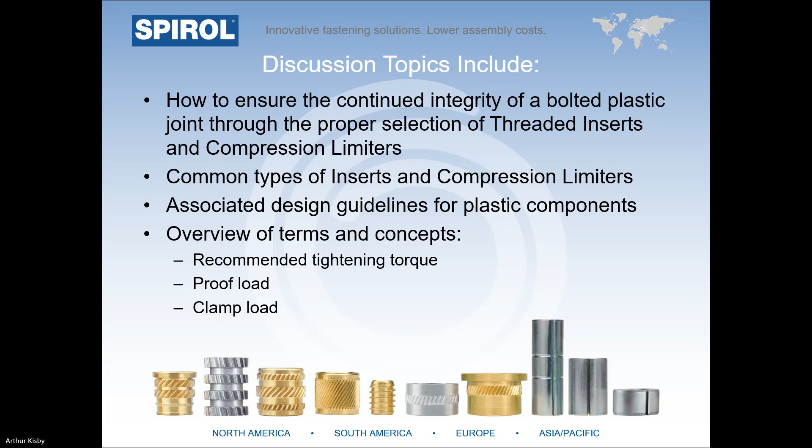But before we get into this, I want to give a brief overview about SPIROL itself. SPIROL is a global manufacturer and supplier of engineered components used for fastening, joining, and assembly. We have 12 major product lines, each one designed to improve product quality, simplify assembly, and/or reduce total cost of assembly. We're the only company who designs and manufactures both our engineered fasteners and installation equipment.

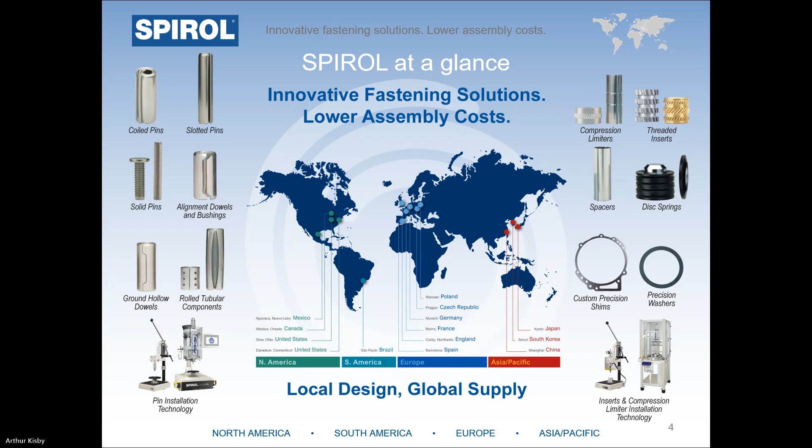Our focus is not just about supplying a high quality product, it's on partnering with our customers as early in the design stage as possible to aid them in design. This is not only for the fastener, but also to make critical recommendations between our product and their components so that their assembly goes together and stays together for the intended life of that assembly. At present, we have 15 locations around the world and have application engineers at each of those locations. We're ready to work with you on your new and existing applications.

Today's webinar is focused on inserts and compression limiters for plastic assemblies.

Where are inserts and compression limiters really used? The answer is pretty much everywhere and in every market, such as automobile, agricultural equipment, rail, recreational vehicles such as snowmobiles, jet skis, and boats. They're used in home appliances, medical equipment, hand and power tools, industrial equipment, and airplanes. They're literally everywhere.

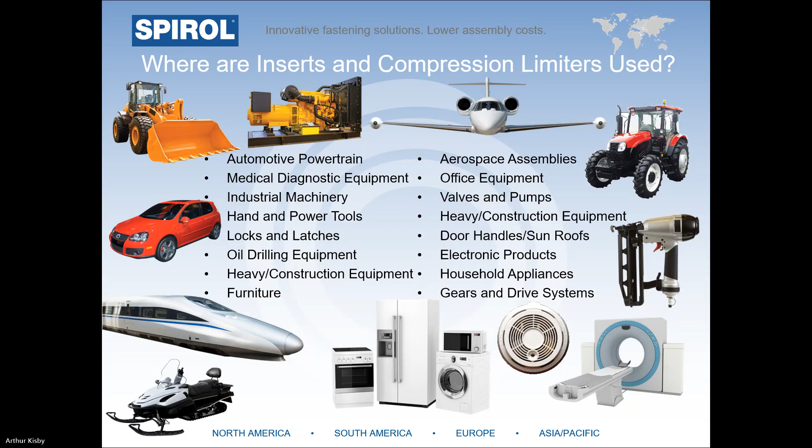In both ICE and EV automobiles, you will find SPIROL products across a multitude of assemblies.

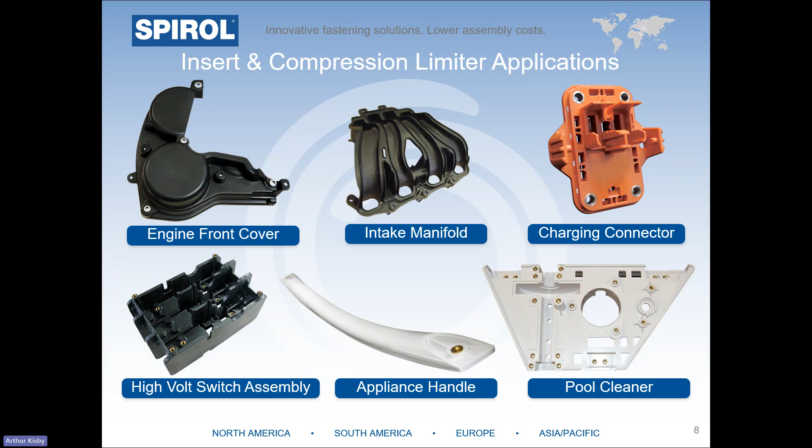These are used for solar-powered homes. In the lower left-hand corner, there's an example of threaded inserts used in a high voltage switch assembly, and then an oven handle where the bolt is threaded into the metal insert rather than directly into the plastic to ensure joint integrity over the life of the major appliance. Finally, you will see an automatic pool cleaner housing where there's literally dozens of inserts used on both sides of the plastic component. When discussing the performance of compression limiters and threaded inserts, it's important to tie them back to the bolts that are being used in conjunction.

While bolt performance is defined by an industry specification that outlines how much force the fastener can withstand before breaking, the proof load is the maximum load that can be applied without risk of permanent deformation. This is when the bolt won't return to its preloaded condition after the joint's loosened.

The clamp load, on the other hand, is how much load is applied to the bolt when the joint is tightened. SPIROL recommends that a joint is tightened to clamp load somewhere between 25 and 75% of the proof load, due to the relatively large tolerances associated with torque measurements.

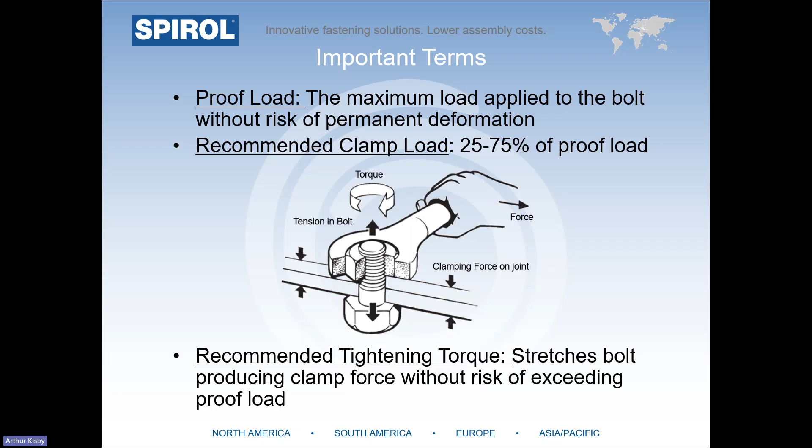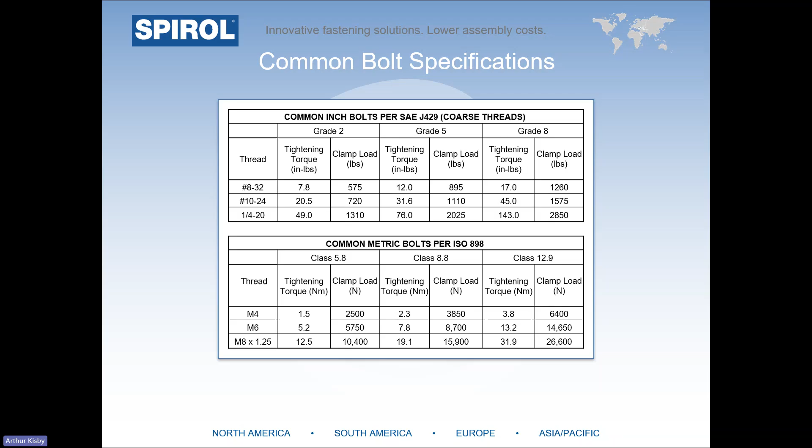The amount of load a bolt can withstand is typically defined by the bolt's thread size and length, grade for inch bolts, and class for metric bolts. What's displayed on the screen here are the most common bolt specifications defining bolt strength. This table illustrates each thread size's tightening torque and clamp load specifications.

So why do people use threaded inserts in plastic? Well, first and foremost, inserts provide reusable threads and form secure, tight threaded joints. Since you thread directly into metal rather than plastic, you have unlimited assembly and disassembly without fear of stripping the threads. You're able to meet the proper seating torque for the bolt.

Of course, that's if the integrity of the plastic is there. Unlike when you thread directly into plastic, you don't have to worry about creep or stress relaxation that could result in a loose joint. And finally, given that the OD of the insert is approximately 2 times the OD of the bolt, this results in 4 times the shear surface for enhanced load carrying of the bolt assembly.

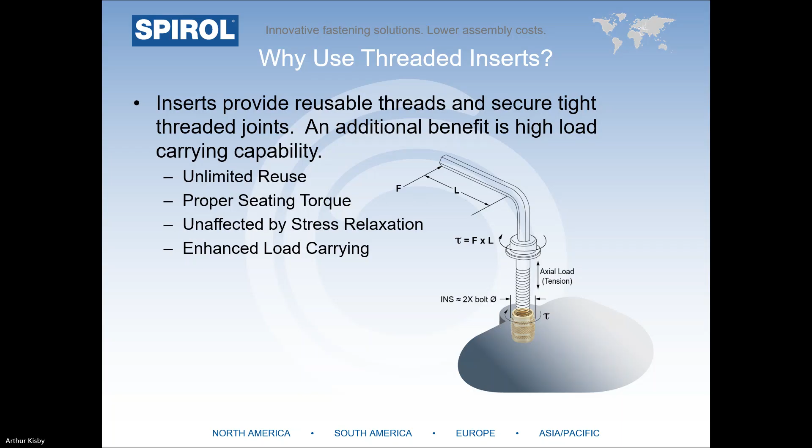Now, before we talk about what types of inserts are good for a particular application, we need to review that there are 2 major types of plastics: thermoplastics and thermosets. Thermoplastics essentially can be melted and remelted several times into several different shapes without compromising the mechanical properties, whereas thermosets have a one-time reaction from liquid to solid and cannot be remelted.

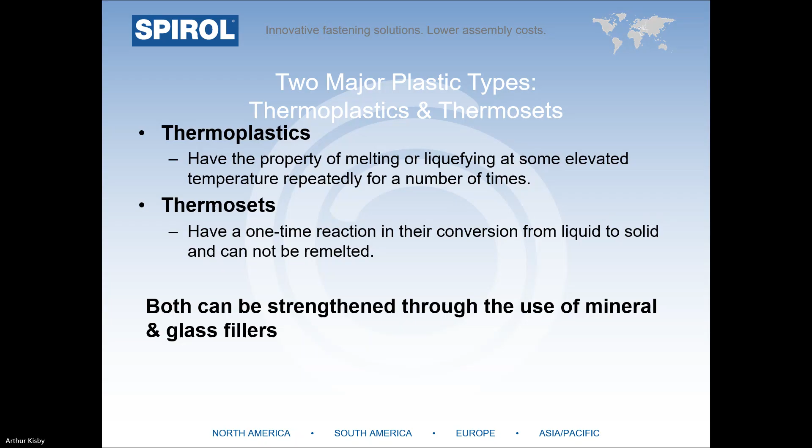Both thermoplastics and thermosets can be strengthened using glass or mineral fillers. Usually the higher percentage of the filler, the stronger the plastic.

SPIROL's threaded inserts are categorized by the primary method of installation. While some of the inserts are designed to be overmolded into plastic, allowing the molten plastic to flow around and into more aggressive retention features, most of our inserts are designed so that they can be installed in a secondary process after the plastic has cooled. We refer to these types of inserts as post-mold inserts.

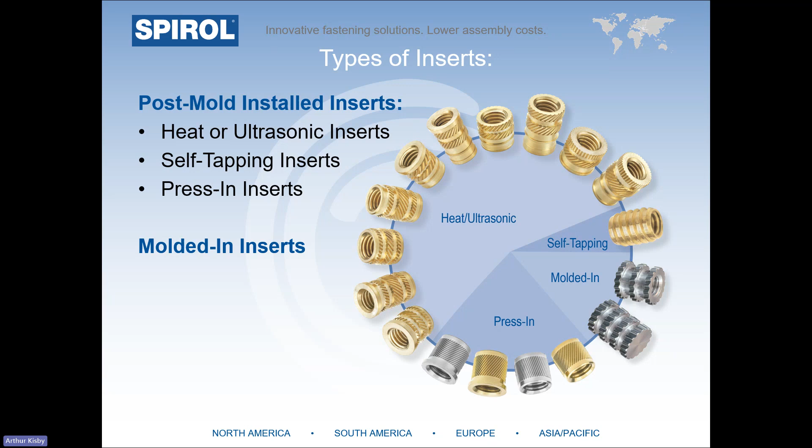Post-mold inserts can be installed in a variety of ways, by either locally remelting the plastic with heat or ultrasonic installation, by pressing them into the plastic cold, or even screwing them directly into the plastic.

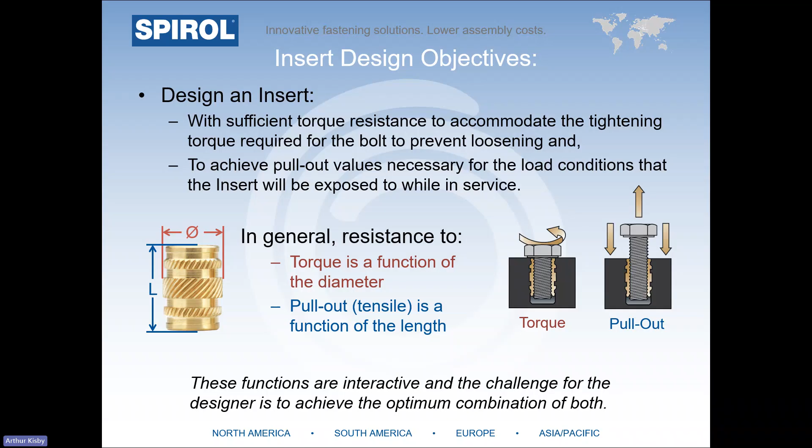Inserts should be designed with sufficient torque resistance to accommodate the tightening torque needed for the bolt to prevent loosening, as well as enough pull-out resistance for the loads they'll face while in use. In general, resistance to torque is a function of the insert's diameter, while resistance to pull-out, also known as tensile, is a function of the insert's length. The designer's challenge is to determine the best balance between these two design criteria and optimize performance within the space allotted, since space is often limited within assemblies. As an insert's length is so critical, we offer almost all styles in both a short version and a long version.

The internal threads of inserts are designed around industry standard metric and inch bolts. Performance of the insert is generally achieved based on the amount of displaced plastic filling the various features of the insert. There are typically three different types of knurls: diamond, straight, and helical, and they are primarily used to increase resistance to torque. Straight knurls have the best resistance to torque since they are perpendicular to the force, whereas helical knurls provide resistance to both torque and pullout, as they are at an angle.

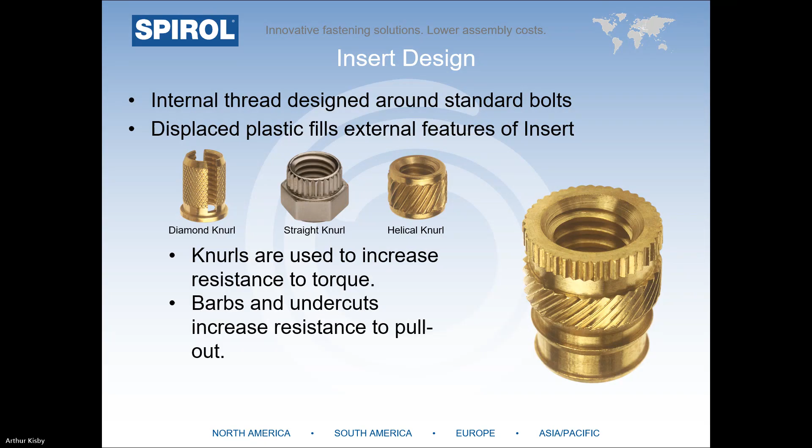In order to specify the best insert for a particular application, it is critical to understand the plastic specifics, meaning not just whether it is thermoplastic or thermoset, but what specific type of plastic it is, the percentage of fill, and the type of fill. If possible, the brand name of plastic, such as a DuPont Nylon 66 with 30% glass fill.

We also need to understand the geometry of the host component, including available space for hole diameter and wall thickness, what bolt size you're planning on using, and what grade or class of bolt you're going to be using. This is very important because, as mentioned earlier, the class or grade actually dictates the recommended tightening torque for that bolt size.

We also want to make sure we understand the performance requirements for the application, torque and pull-out or tensile strength, and what the mating component configuration is. Finally, how do we plan on installing the insert? Is it mold-in or post-mold installed? If post-mold installed, will it simply be pressed into the assembly, tapped into the hole, or heat or ultrasonically installed?

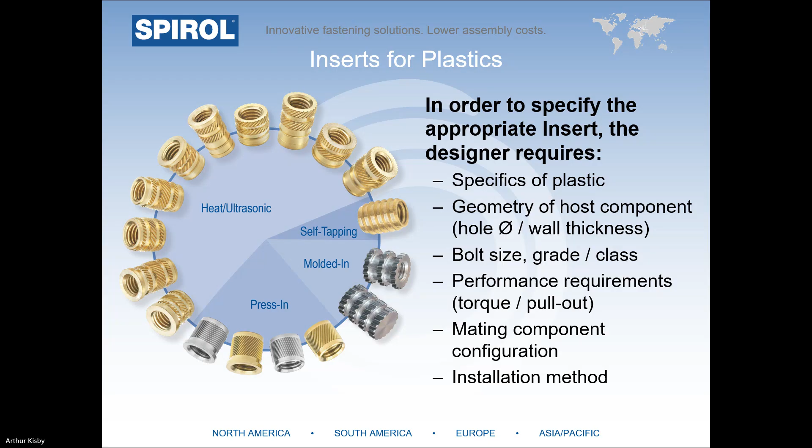There are many factors besides an insert's design that affect how it will perform in the assembly. As the quality of the interface between the insert and the plastic component is so critical to how much torsional and axial loading the insert can withstand, the quality of the insert's installation is paramount.

These images demonstrate how SPIROL recommends validating installation quality through a destructive test. We recommend cross-sectioning the plastic after the insert gets installed so that this interface is clearly visible.

After the insert is removed from the plastic, a mirror image of the insert's features should be present in the plastic. As you can see in the incorrect example on the left, the knurl's imprint in the plastic is very shallow, and there doesn't look to be any evidence that the barb actually engaged with the plastic at all. Also worth noting, there shouldn't be any voids present between the insert and the plastic.

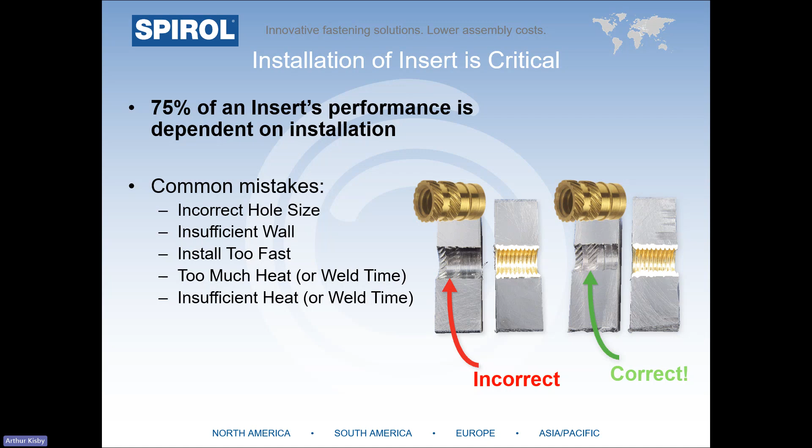Although some common errors that lead to poor installation are listed to the left, the example shown here appears to be the result of a hole size that was a bit too large. Not enough plastic was flowing into all the retention features in the knurls.

It's not just the interface between the insert and the plastic host component that are critical to performance. The mating part can also significantly reduce resistance to rotational torque when it doesn't support the top bearing surface of the insert. We call this condition jackout. When the hole of the mating component is larger than the face of the insert, there is nothing to prevent the insert from dislodging and moving up into the void of the mating part. To avoid jackout, we recommend that the mating component's hole is smaller than the face of the insert, but large enough to allow the bolt to pass through.

One strategy you could implement is to use a flange or a head on the top of the insert to increase the bearing area. It's worth noting that using a headed insert does increase insert costs due to the additional material needed to form the head.

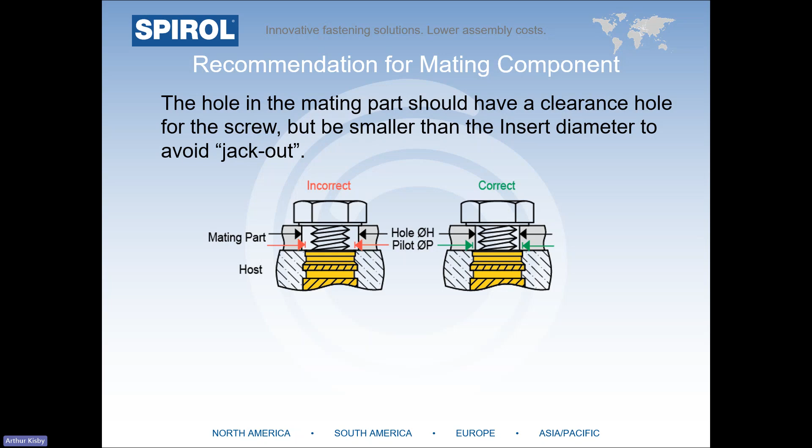When installing the insert into the hole, the top of the insert should be as close to flush with the surface as possible. The maximum protrusion above this flush should be 0.13 millimeters, or 0.005 inches. You really want to be careful about having the insert subflush, or else you risk again jacking out the insert out of the hole, or at least breaking the plastic plane while torquing down the bolt, which could affect the joint integrity.

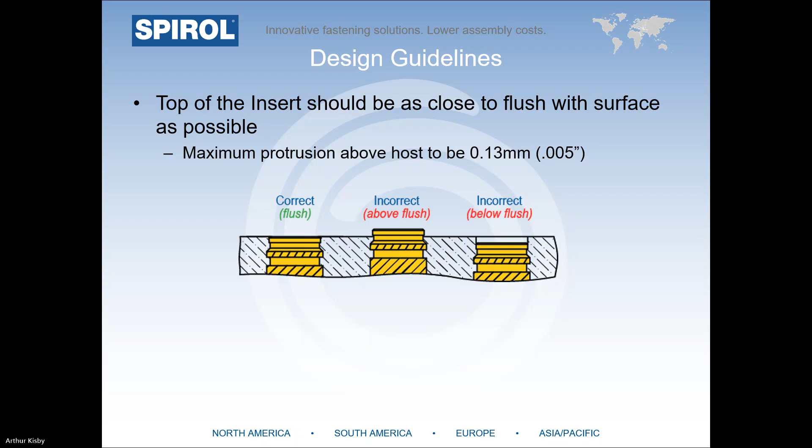In terms of hole configuration, the diameter of the plastic around the hole, known as the boss diameter, should be sufficient enough, typically twice the OD of the insert itself, to avoid bulging during installation and ensure integrity to withstand the recommended tightening torque. Also, in the event that it is a blind hole, the length of the hole must be long enough to prevent the screw from bottoming out.

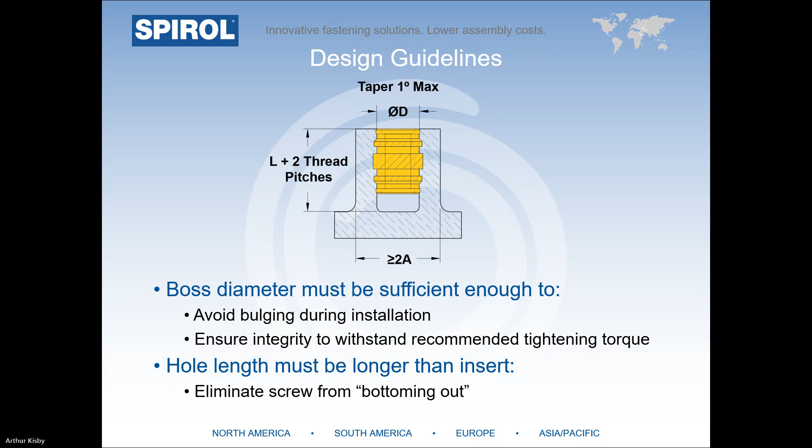For heat ultrasonic installation, the length must be plus 2 threads to allow the flash or material built up ahead of the insert a place to flow during installation.

The hole size of an insert gets installed into is also critical for the insert's ability to perform in the assembly. For inserts that are used in straight holes, it's recommended that the taper doesn't exceed 1 degree inclusive, or a half a degree per side.

For inserts intended to be used in a tapered hole, we recommend the taper to be 8 degrees, or 4 degrees per side. Using an insert designed for a tapered hole assists with removal of the plastic component from the mold, but also allows the insert to sit deeper into the hole prior to the installation, facilitating square and faster installation.

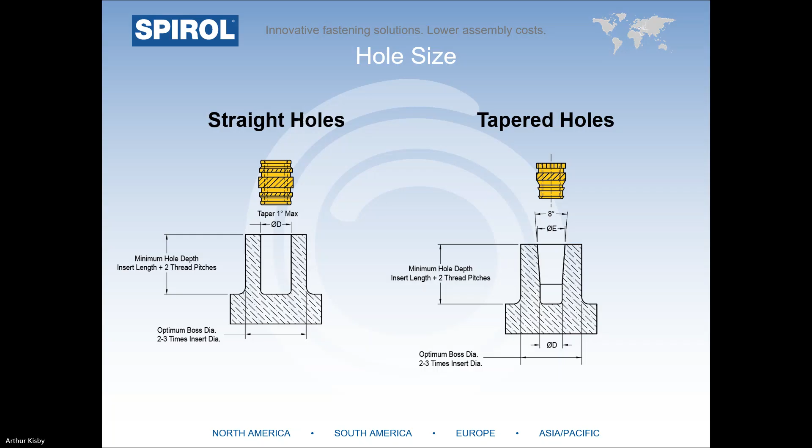Regardless of the hole style, it's imperative to hone in on the correct hole size for the application. As a general rule, larger hole sizes decrease performance, while smaller hole sizes may induce undesirable stresses and potentially lead to cracking. The recommended hole size found in our design guidelines will typically need a slight positive adjustment, if any. Usually, the hole size needs to be adjusted upwards further when the plastic type is more viscous or it doesn't flow very well, such as when fillers like glass are used.

In the example shown to the left, no filler is being used and the plastic is polypropylene. Noting the recommended hole size for an M6 heat installed insert is 8 millimeters plus 0.08 minus 0 millimeters. However, if that same component was made of nylon 6/6 with 35% glass fill, we'd recommend adjusting the initial hole size up by 0.15 millimeters.

It's also important to emphasize that the core pin used to mold in the hole should be appropriately sized to allow for plastic shrinkage after cooling. The hole size should be verified with a plug gauge post-cooling. In summary, it's imperative that a designer perform testing to validate the appropriate hole size for the application, not just rely on the recommended hole sizes we publish in our catalog.

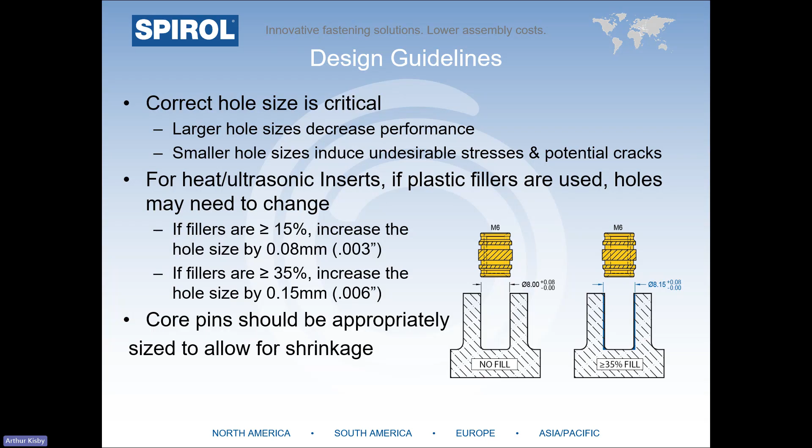In high-load applications, a headed insert with the head located opposite the load in a pull-through configuration is a design consideration that may be warranted. Tapered inserts should never be used in pull-through applications or in thin-walled bosses, as they will cause cracking of the plastic.

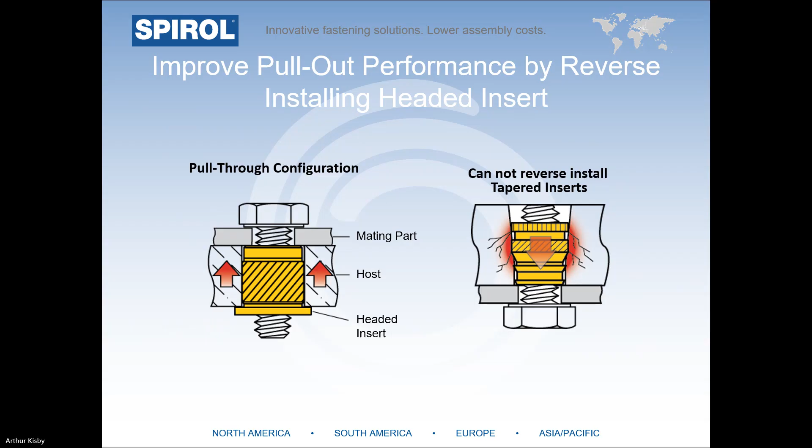Each type of insert differs in design, which yields different performance results, as well as the cost of the insert and the overall cost of the assembly.

Starting with heat ultrasonic inserts, some are designed for straight holes and others for tapered holes. If you attempt to use a straight insert in a tapered hole, the performance will not be optimal. In many cases, you may end up totally cracking the plastic.

Symmetrical inserts require straight holes. As Arthur just said, tapered holes facilitate proper seating of the insert, and since the surface contact between the insert and the hole is maximized, installation time is usually less than that of a straight insert of the same size.

Many heat ultrasonic inserts are available in both a long and a short version of each thread size. Long lengths maximize torque and pull-out resistance, while short lengths are good for less stringent requirements at a lower cost and shorter installation times. You can also get most styles with or without a head.

The head provides the bearing surface for the mating component that also prevents jackout, or when used in reverse can prevent pull-through. However, adding a head comes at a cost because you have to start with a larger piece of raw material to create the head.

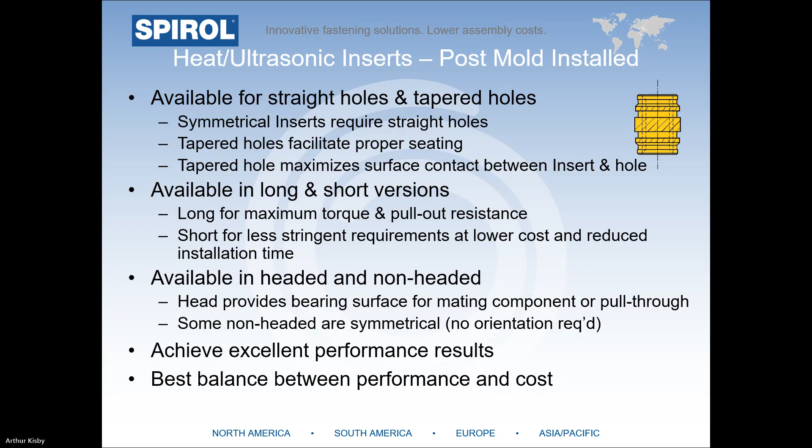Notice the external thread on the self-tapping inserts. This type of post-mold installed insert is actually threaded into the hole after the plastic cures. The external threads are designed with a thin profile to minimize stress in the plastic, and relative coarse pitch to provide maximum plastic shear surface to resist pullout.

As a matter of fact, these provide the best resistance to pull out of any SPIROL post-mold installed inserts. However, due to the external thread, the manufacturing cost of the insert is usually higher than other types of inserts, and the cost of installation is the highest of all post-mold installed inserts because of the care and time it takes to thread it into the part.

The schematic in the lower right shows the recommended length of hole for this type of insert is 20% longer than the length of the insert.

Counterbores are typically not recommended for any insert except self-tapping or headed inserts. Counterbores are recommended for self-tapping inserts to reduce the risk of flaking. The outside diameter of the counterbore should be equal to or larger than the outside diameter of the self-tapping insert.

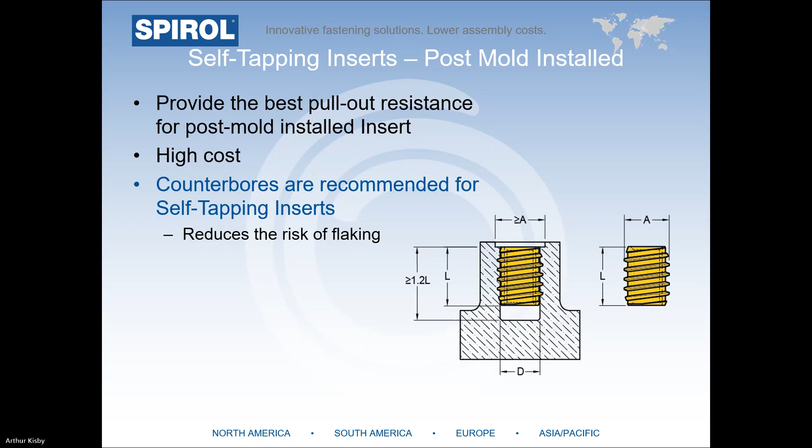Our press-in inserts, on the other hand, were designed to reduce installation cost. Instead of the large exterior threads you find on the self-tapping inserts on the previous slide, these types of inserts have helical knurls to provide both torque and pull-out resistance without the need for screwing them into the hole.

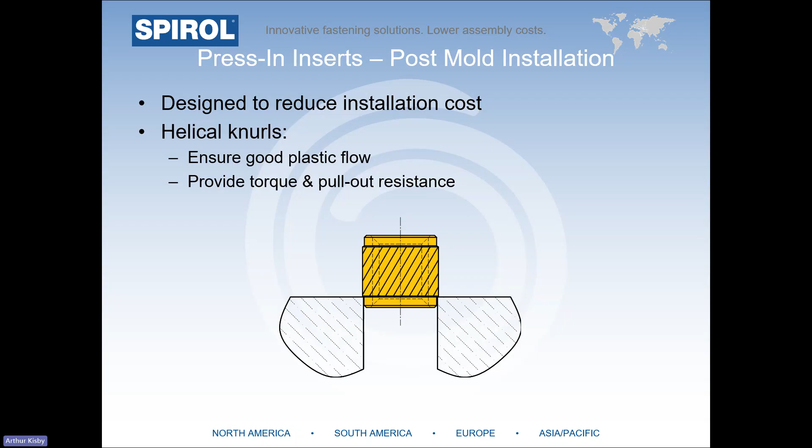As you can see in the illustration, a pilot facilitates straight insertion into the hole, and since the pilot diameter is smaller than the hole, and the length is long enough to allow the insert to sit in the top of the hole before installation, they're a great low-cost option for applications that don't require super high performance. Press-in inserts are available with or without a head, and we offer them both in brass and in aluminum.

For applications that require the highest performance, our molded-in inserts are designed for maximum pull-out and torque resistance. These are often the inserts of choice for thermosets, which are the types of plastics that can't be remelted, as well as plastics with a much higher percentage of filler.

The minor thread diameter tolerance on these overmold inserts are tightly controlled to provide a repeatable fit on the core pin that's used during the molding process.

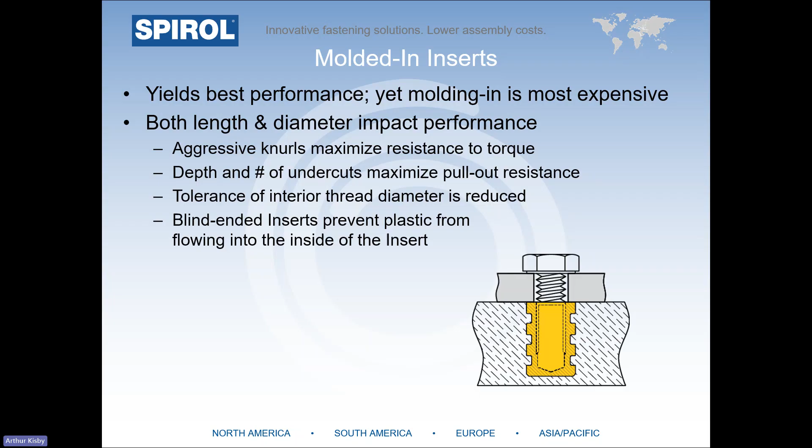SPIROL offers a symmetrical through-hole version that eliminates the need for orientation, as well as a blind end version, which is sometimes preferred by some of our molders. These are made out of 2024 aluminum, a lightweight, lead-free grade.

When using post-mold installed or molded-in inserts, there are many factors to consider. Installing inserts after molding reduces in-place cost since molding time is shortened as there's no placing of inserts over the core pins. Secondary cleaning of flash or plastic around the hole entrance, which often occurs with mold-in inserts, is also eliminated. Installing inserts after molding also reduces rejects and the chance of mold damage from a dislodged insert. Keep in mind that some molds cost tens of thousands of dollars.

Post-mold installed inserts can yield excellent performance results. Conversely, when molding inserts into the assembly, molding time is increased as you have an operator or pick-and-place robot loading the inserts over the core pins before the mold cavity can close. Precise placement of the inserts is required, otherwise mold damage can occur, which can be expensive in both repair and downtime. That said, you do get the best performance out of molding inserts over any other method. The question is, what performance do you require for your assembly?

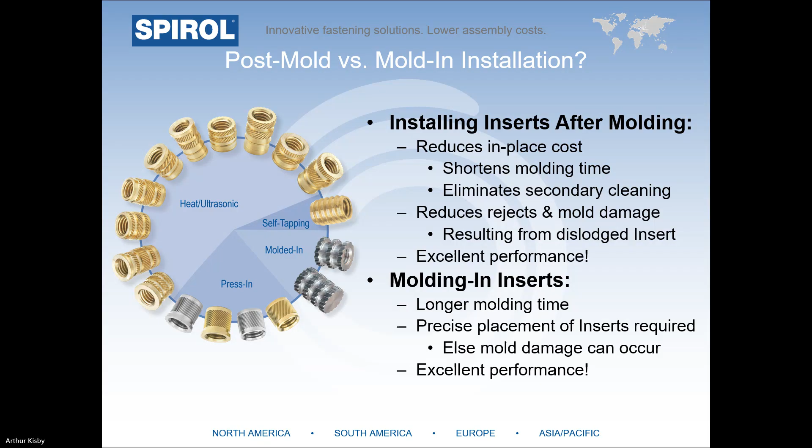So what affects the performance of an insert? There are many variables that impact insert performance within the application. Not only does insert design and quality of features like knurls, barbs, and undercuts matter, but also the type of plastic. For example, an insert installed into nylon 6/6 with 30% glass fill will totally outperform talc-filled polypropylene, as it's much more rigid.

The design and quality of the plastic molded part also plays a huge role in performance. Are there any knit lines in the boss surrounding the insert? Is the wall thickness of the plastic sufficient to handle the applied stress? Obviously, hole size will also affect performance a lot. Even hole size variation within the recommended tolerance range found in our catalog will result in different performance.

Finally, the quality of the installation process impacts performance as well. Was the proper temperature used? Were the inserts installed too quickly, etc.? Another common question we often get is, what temperature do I use for the installed inserts, and what pressure should I apply?

We recommend starting with a temperature 50 degrees Fahrenheit above the initial softening temperature for the plastic in question. But for plastics with fillers, that initial differential should be increased to about 150 degrees Fahrenheit. Pressure is insert size dependent and should be as low as possible, in the 5 to 15 psi range, just enough to push the insert into the hole as the plastic melts.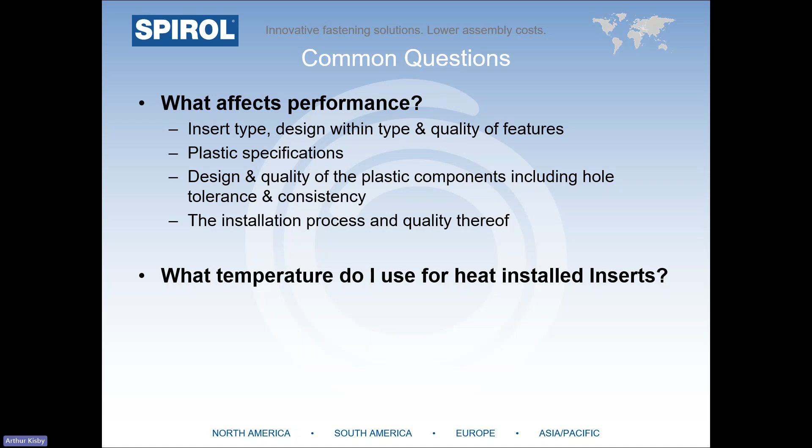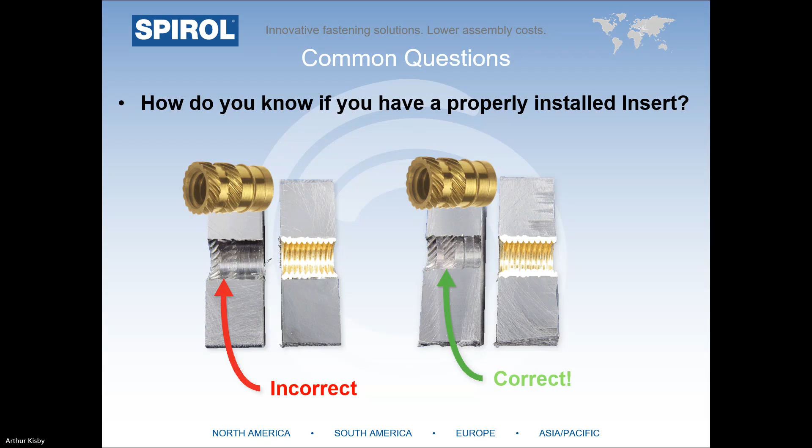It's extremely important to ensure proper plastic flow into the features of the insert, as this dictates the torque and pull-out performance you achieve. As you can see on the left, the plastic did not sufficiently flow into the retention features, which will result in low insert performance.

By far, the most common question is how much torque and tensile strength can be achieved with the insert in my specific plastic assembly. It is impossible to answer this without testing it in your actual assembly. All of the factors we just went through a couple of slides ago affect performance. In addition, there are so many different types of plastics and fillers coupled with the complexity of component design.

SPIROL provides a section in our insert design guide that displays the performance of various styles of inserts installed into a nylon 6/6 without fillers, in drilled versus molded holes. This performance data is provided as a comparative guide between insert types, not to provide actual performance. For this, you need to test.

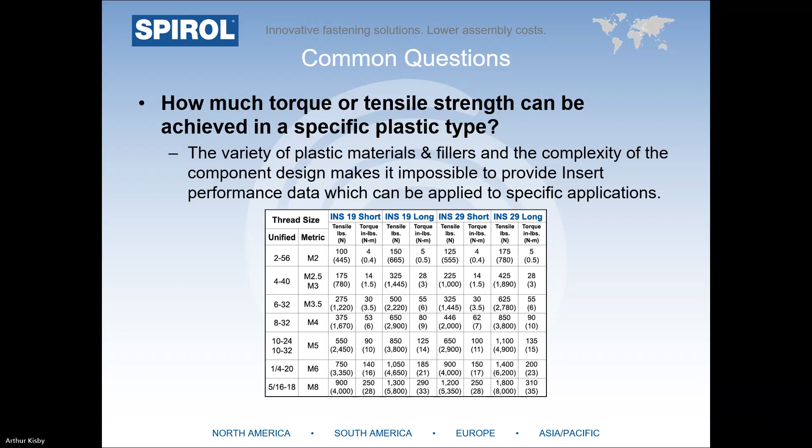Okay, so now we'll start to talk about compression limiters. This section of the presentation will go a bit quicker since a lot of the same concepts apply. Consider these as like a sister product to the inserts we've been discussing.

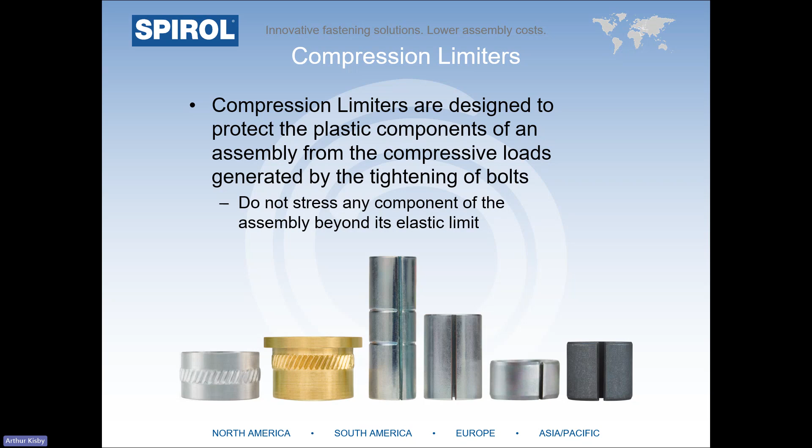So what are compression limiters? Essentially, compression limiters are spot reinforcements of metal used in plastic assemblies, designed to protect the plastic from cracking or yielding under the compressive load of a bolt. We implement compression limiters so we don't stress plastic components beyond their elastic limit.

The ability of a compression limiter to carry a compressive load is determined by two factors: the strength of the material, and the cross-section area of that compression limiter. Limiter strength can be increased by increasing the wall thickness, increasing the strength of the material, or a combination of both.

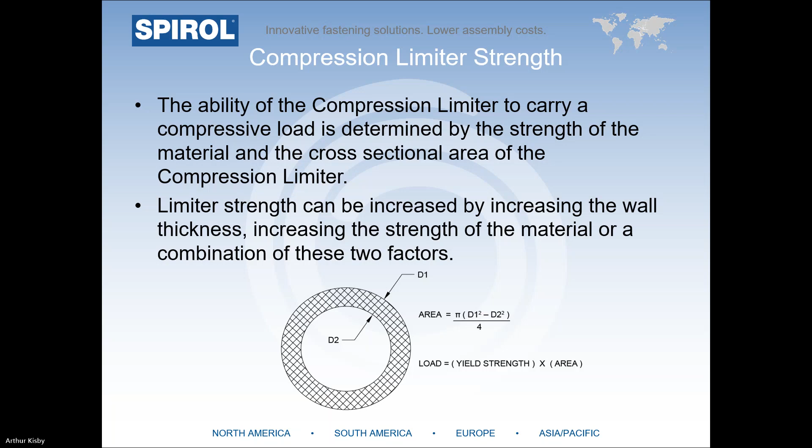There are two critical design rules to consider when using any compression limiter. Rule number one is that the bolt or washer must contact the compression limiter. This condition must be met without exception.

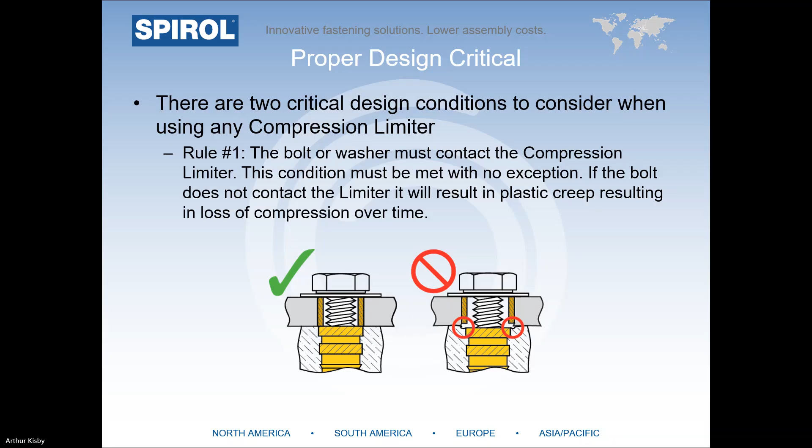The image on the left shows a properly bolted joint. Rule number two is the plastic should have a small amount of compression. If the plastic is not compressed, the host component may move about the limiter.

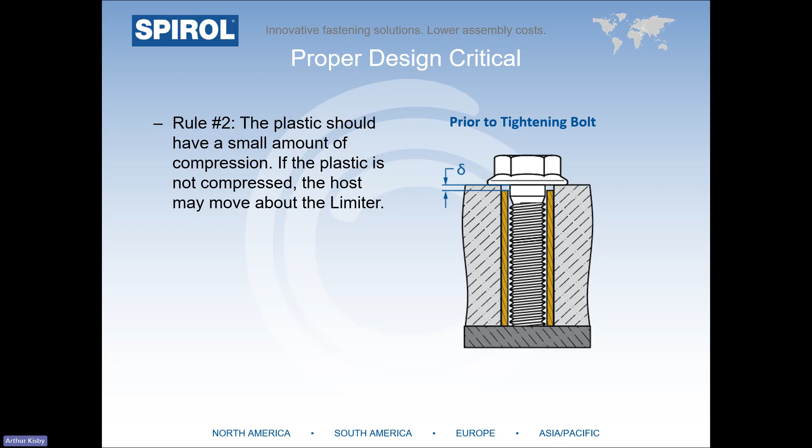It's important to note that the delta showing in the gap in this image is only there prior to the torquing down of the bolt. Once the bolt is actually tightened down, the plastic needs to be compressed to get that metal on metal contact that was just mentioned. That is really just a non-negotiable.

In order to properly evaluate an application and determine the most appropriate compression limiter, the following needs to be understood. It is important that both the bolt size and the class or grade is known, as this will dictate the recommended tightening torque, which ultimately determines how much force the compression limiter must withstand.

We also need to understand the max allowable compression of the specific plastic. Most plastics can compress between 5 to 15%.

The plastic thickness and compression limiter length tolerances are also very important. Ideally, the maximum compression length should be equal to or below the minimum thickness of the plastic, without exceeding max compression. See how this is all intertwined with each other?

The yield strength of the mating component is also important, as you don't want to indent the material of the mating part, creating witness marks, when the bolt is torqued to the recommended tightening torque.

And finally, we want to understand the environment in which the compression limiter will be exposed, as we want to understand both the environmental and the galvanic corrosion requirements.

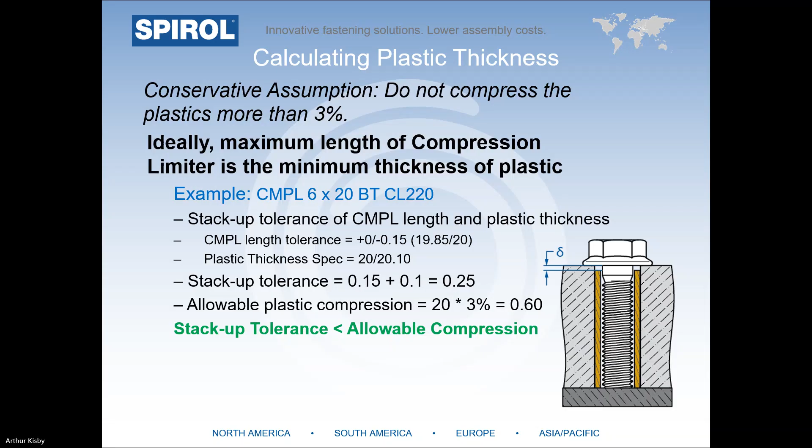So now, to tie in the rest of the information we require when making recommendations for compression limiters that we just reviewed: we discussed bolt size, class, and grade, compressive load created by the bolt, and talked about the clamping load being 75% of the proof load.

We have the maximum allowable compression of the plastic, known as the modulus of elasticity. Most plastics can compress between 5 and 15%. Plastic thickness tolerance, compression limiter length tolerance, mating component yield strength, and corrosion resistance requirements.

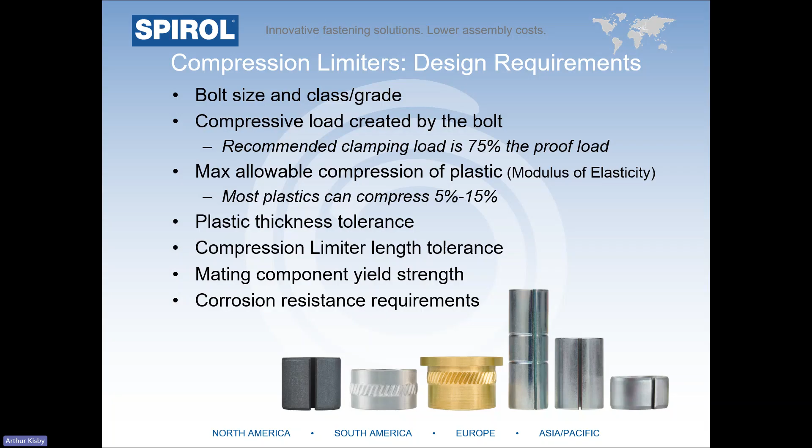So, is the bolt strong enough to compress the plastic? Well, this scary looking equation is how you calculate this, but for time considerations, I'm not going to go through all the details, but it will be included in the presentation that will be emailed to you in a couple of days.

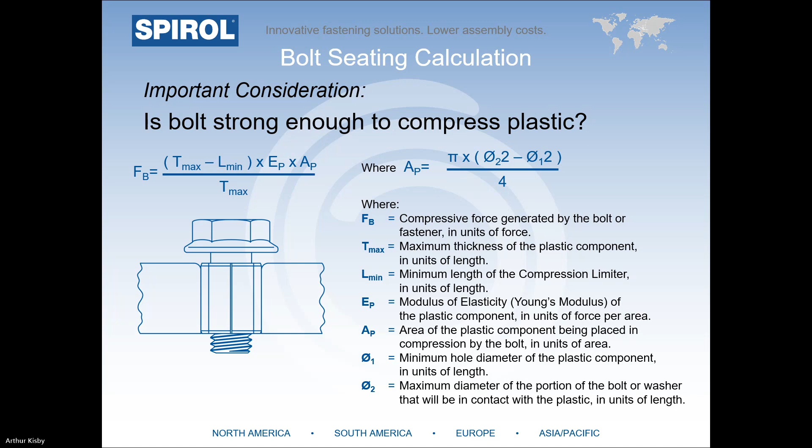So in terms of selecting which type of compression limiter is best for your application, there are a variety of compression limiters available. They're usually designed around standard bolt requirements and the method of installation. The overarching difference between the limiters is that some are rolled from steel and some are machined from aluminum and brass.

Within the roll form steel category, we offer circular shape with split seam for post-mold installation, or a butted seam for molding in. These are also offered with an oval shape to accommodate a wider tolerance in one axis for easier alignment, which is particularly useful when you're using multiple limiters in an assembly.

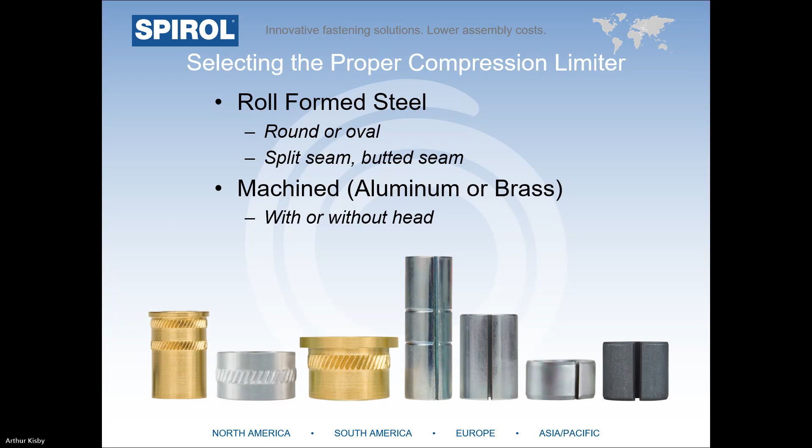Within the machine category, they can be installed either by pressing in or molding in. You do need to specify a particular machine version to match the installation method. A head can be added to increase the bearing surface against the mating component of the bolt. Unless there's a concern with galvanic corrosion, aluminum is generally preferred over brass because it is lightweight, lead-free, and stronger than brass.

In terms of how to choose between machined or roll form limiters, the reality is that when it makes sense, rolled steel is definitely the most economical option.

However, for short compression limiters, particularly when the length to diameter ratio is less than 1, it makes most sense to use a machined limiter because it is difficult to roll a limiter that's short and keep the ends square. Also, machined limiters are preferred in mold-in situations where the plastics have very low viscosity, since there are no seams for the plastic to seep into.

Machine limiters can be supplied with a head for a larger bearing surface for soft mating materials. A head also eliminates a washer. In most cases, though, we suggest just using a flange bolt instead.

Finally, if you're going to use a machine limiter, we recommend aluminum over brass, again, since it's lighter, stronger than brass, and lead-free. As I said a few minutes ago, rolled steel limiters are less expensive, and they can also be heat treated to withstand higher tightening torque.

The split seam is designed such that the part is pressed into the assembly, whereas the butted seam is suitable for molding in with viscous materials.

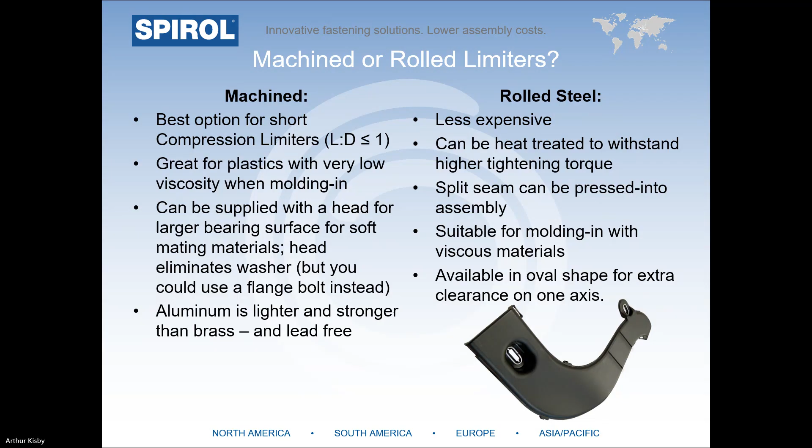So, to summarize design considerations for compression limiters that we've been covering, the most important criteria you should take away from this is the need for metal on metal on metal contact, or bolt flange on compression limiter on mating component contact, when the bolt is tightened.

Remember, without this, you're adding cost to the assembly without really any compression, without the value of any compression limiter, as it's just floating within the joint.

Ideally, we want some plastic compression of the plastic, as it does tend to relax over time, and we wouldn't want the plastic host to shift up and down along the length of the limiter. In some instances, achieving this may be difficult, especially in cases where the plastic host is on the thinner side and your mold can't hold super tight tolerances.

So we implore you to consult with us so we can provide more complex recommendations when required. There are always ways of achieving the critical metal on metal on metal contact to optimize your joint, while also maintaining some plastic compression. In some instances, though, we'd want to partner with you in order to provide application-specific recommendations.

Well, just like with the plastic, we also need to make sure that the bolt does not exceed the elastic limit, by assigning a clamp load of about 75% of the proof load.

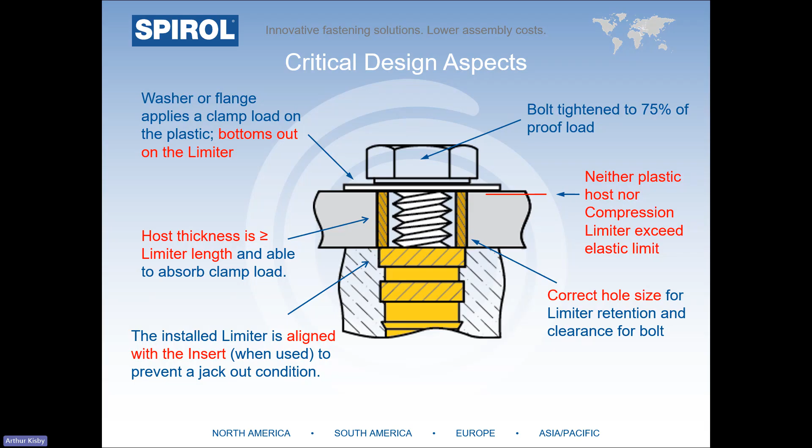In conclusion, think about inserts and compression limiters as early as possible in the design stages of your project. This will help you design in standard components, which reduces time and cost since they can likely be supplied from stock. Also, don't overspecify your requirements. If you say to a manufacturer, just give me the insert with the highest torque and pullout when you don't really require that kind of high performance, you're going to pay a lot more than you need to.

When designing your assembly, use proper design parameters. Please do yourself a favor. If switching from one supplier to another, provide the actual performance requirements versus just saying, give me the same high performance as the one I'm getting now with my current parts. Recognize that if you ask one manufacturer to make the same exact part as someone is already making, you're going to usually pay more for the new manufacturer because we're not set up to make that part.

Finally, but above all, make sure to test the bolted assembly to ensure the performance requirements are being met.

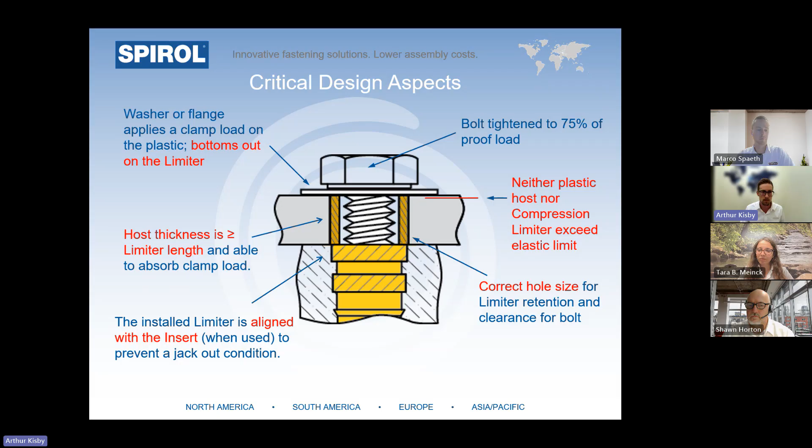Awesome, thank you Arthur, I almost overlooked the one in the chat. I'll get one more from the Q&A: we use steel inserts because they are most economical, do you offer those as well?

I can take that one. At this point in time, we actually don't offer any steel inserts, and that's for a few reasons. Generally speaking, steel is going to require some sort of supplemental finish or coating to ensure the fastener has corrosion protection. With an internally threaded fastener, the risk becomes ensuring a consistent coating along the thread. Sometimes with internally threaded components or a hole, that coating can become inconsistent in size. And because the thread is so important for function in the assembly, as well as being a feature that oftentimes can't be 100% checked for compliance, understanding the automotive industry's expectations surrounding quality...

That's one reason we kind of shy away from using ferrous materials that have that inherent environmental corrosion. Another consideration is, depending on the installation method, a lot of times these fasteners have to be heated up in order to be introduced into the assembly and provide performance. During that process, steel can become corroded, whether it's sealed or not. So for those reasons, mainly surrounding corrosion expectations and our customers' applications, we typically stick with non-ferrous materials, a la brass and aluminum.